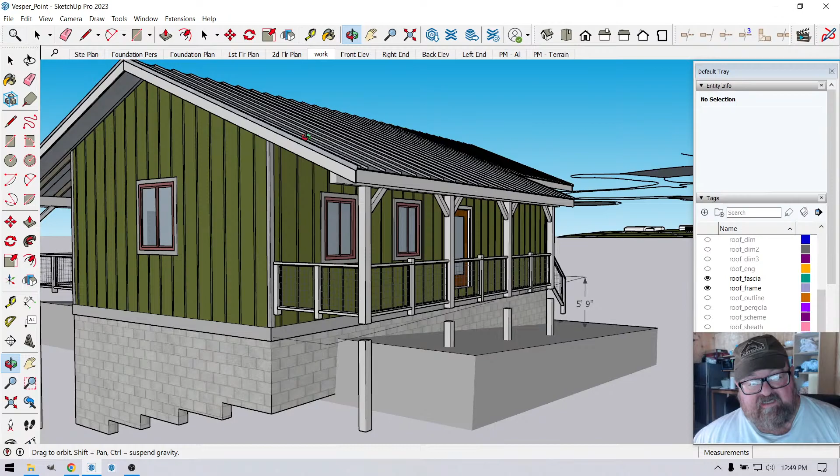Okay, I'm working on this church camp cabin, and this is the foundation perspective. Let me update that. But just to show you, these are the little cabins I designed for this church camp.

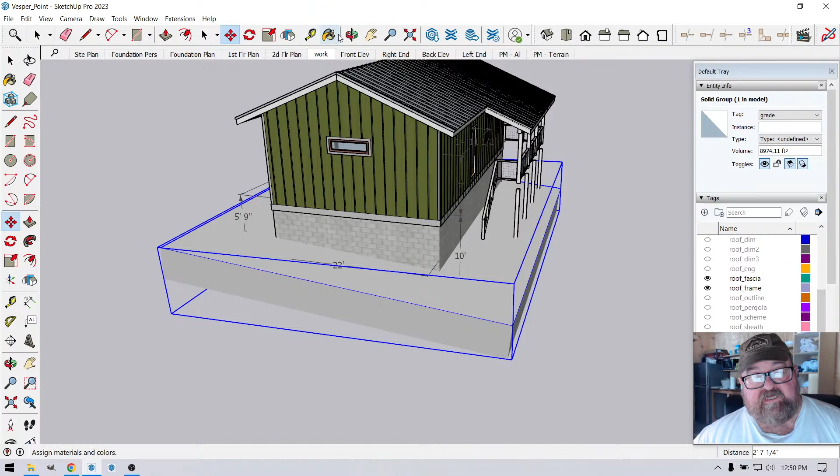I rotated it so that it would work better on the drawings. And so now I got to move my little site thing around. It's probably going to be down here. I'm kind of projecting the grade to be like that. Let's see.

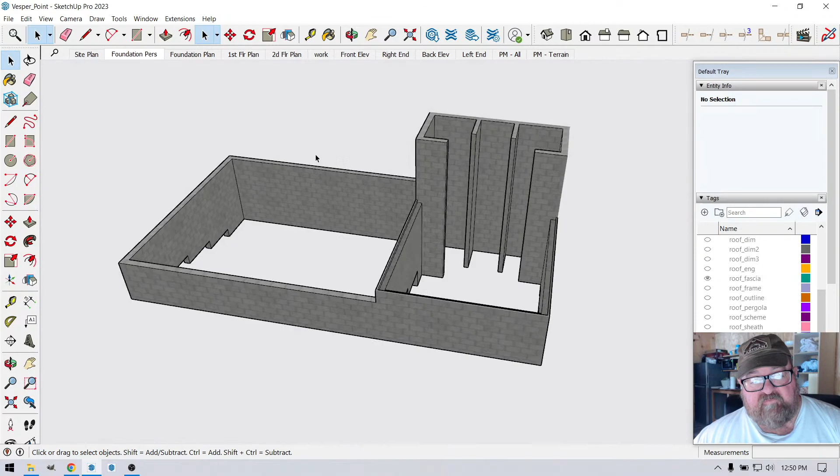So anyway, enough of that, because what I really need to do is put in this floor system. And so I thought I would just go live and share the love. What I'm going to do is start off with a rat sill, a mud sill, sill plate.

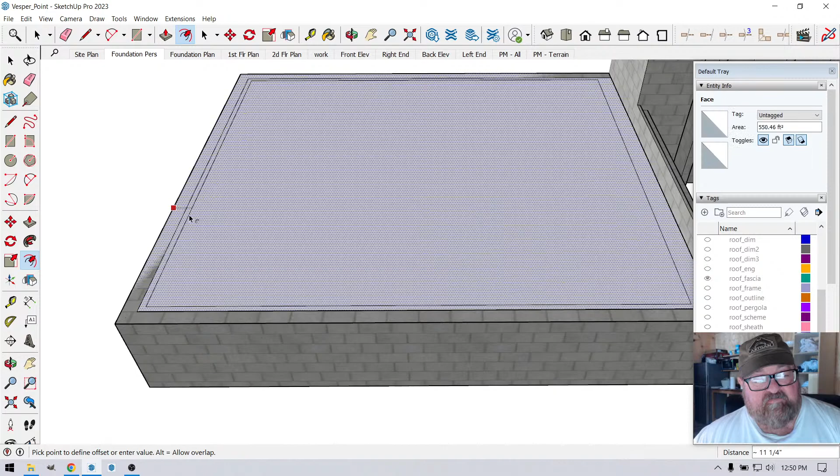It's like 5 different terms for this. It's basically, let's see, let's go with a 2x8, 7.25. And we will bring it up 1.5 inches.

Let me turn off my air conditioner. The trusty remote, aren't I? High tech.

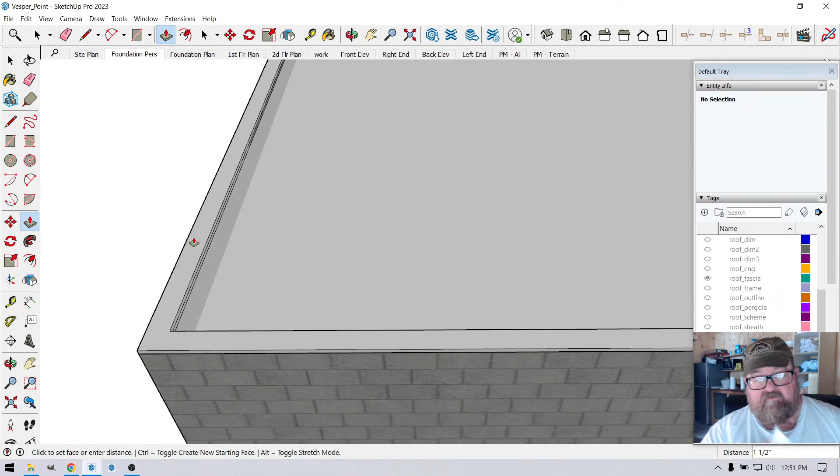So I just used the push pull tool to bring that up. And let's give it a material color so that it makes it easy to identify. Select wood treated. Let's see, wait a minute. Plywood. I thought I had a treated pine.

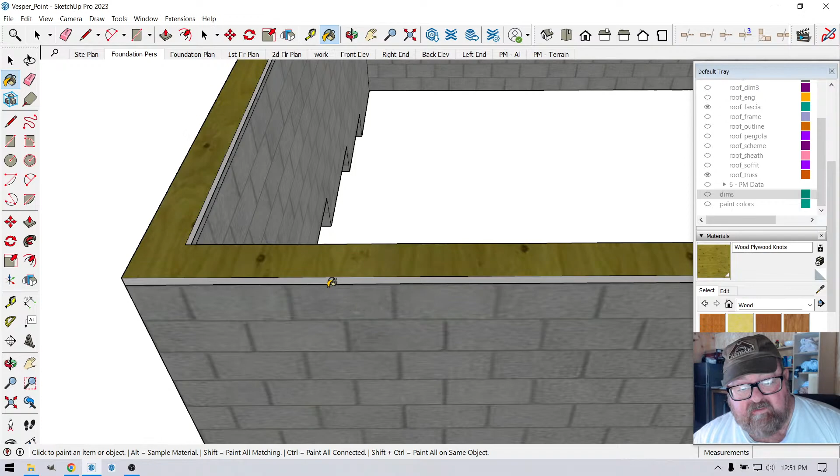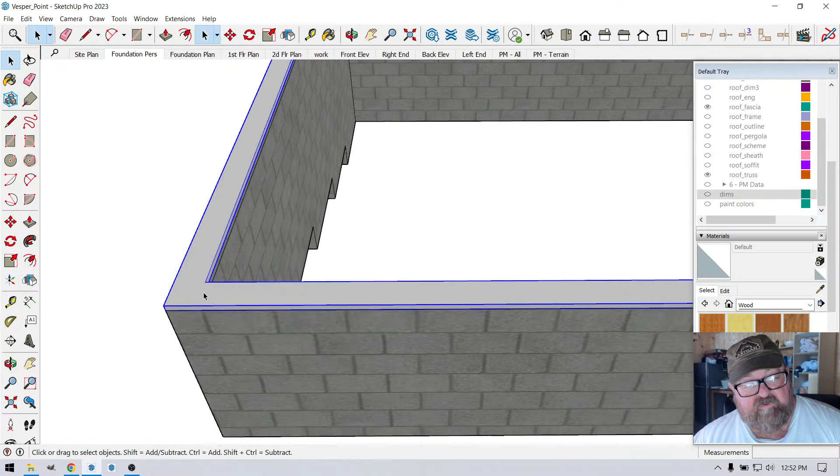What I should have done was pick the whole thing. Let's do this. Alright, let's make a group. And we'll go in there and select. Oh, I see, it wasn't selected. Okay, now you can see the grain is running the wrong way, but really what I'm trying to do is just give it a color.

So that'll work. And then over here, this will have to be pushed back. Get some pushback, because there won't be a plate right there.

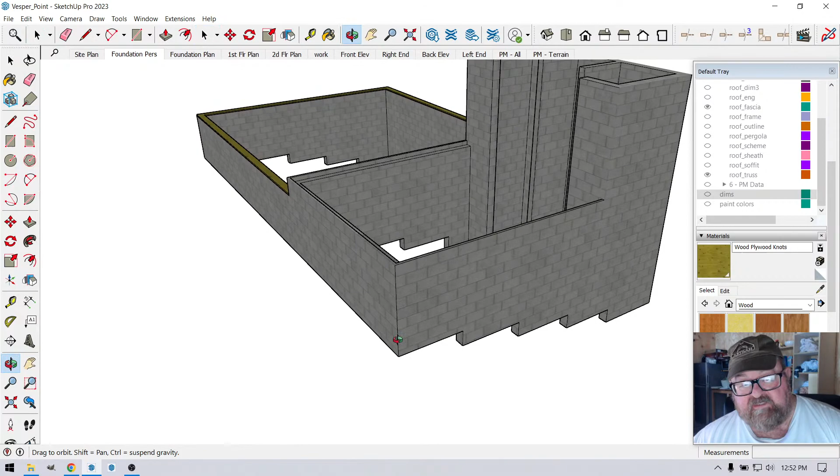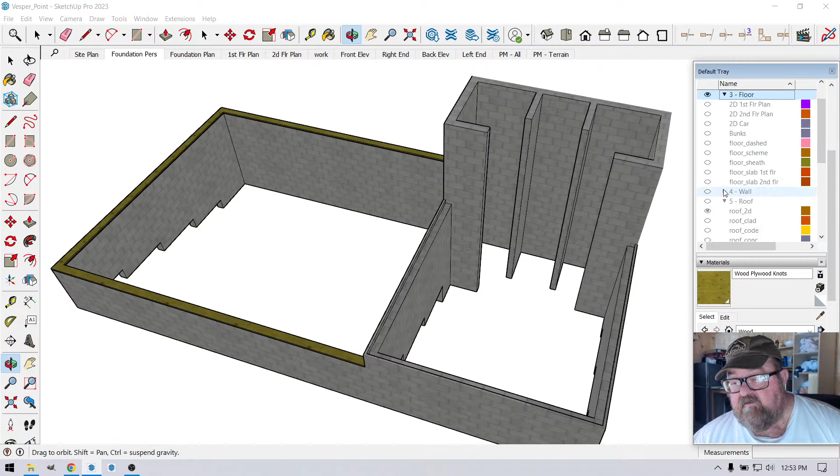The way this floor is going to work is, we've got these kind of steep lots, but they want the bathrooms to have a concrete floor, and then the walls of the showers to be concrete also. So if I turned on the concrete floor slab, that would be it. I'll probably just leave that on. This will demonstrate how the floors need to be flush with each other.

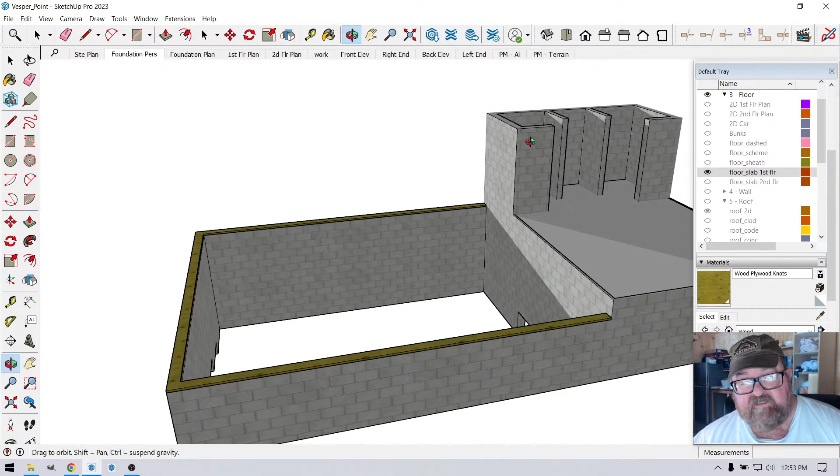Now that we've got our pressure treated plate down, the anchor bolts would already be there. I think this was kind of a schematic mode I did this in. I'll probably go back and use the Medeek foundation and do it that way, because it'll automatically put in the anchor bolts and everything. But I had this weird situation going on where I want to pour — I'm showing concrete block, but I think I'm going to pour all this out of concrete. That way I'll eliminate a subcontractor. I can get my poured wall subcontractor to do it.

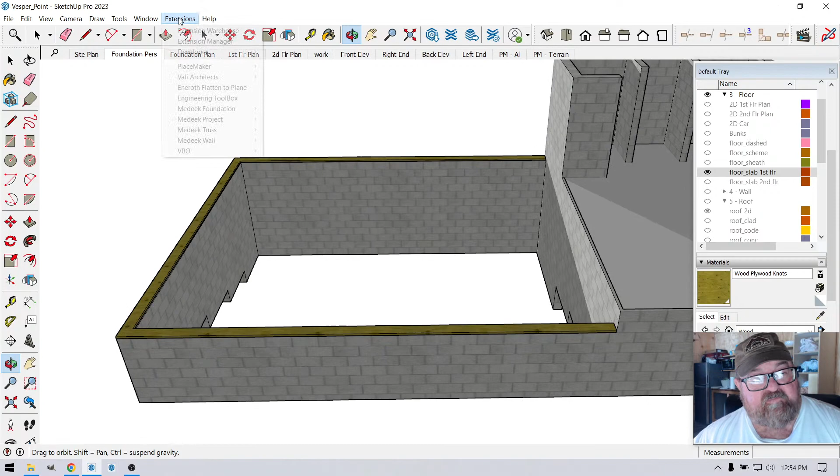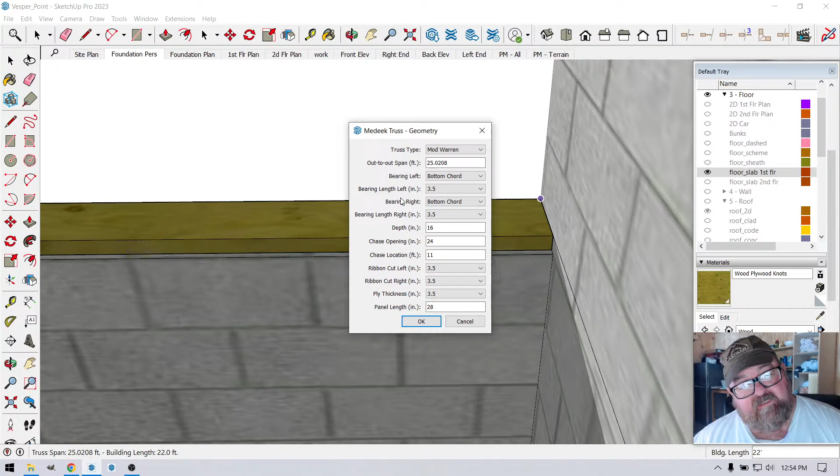So now I want to put these floor trusses in. Floor truss, rectangular, and I think I do this. Go over here. And then, oh, let's see. What I should have done is I should have set that back. Let's cancel this. I'm going to set this back so that I can, well, let's, okay, I'm going to delete it.

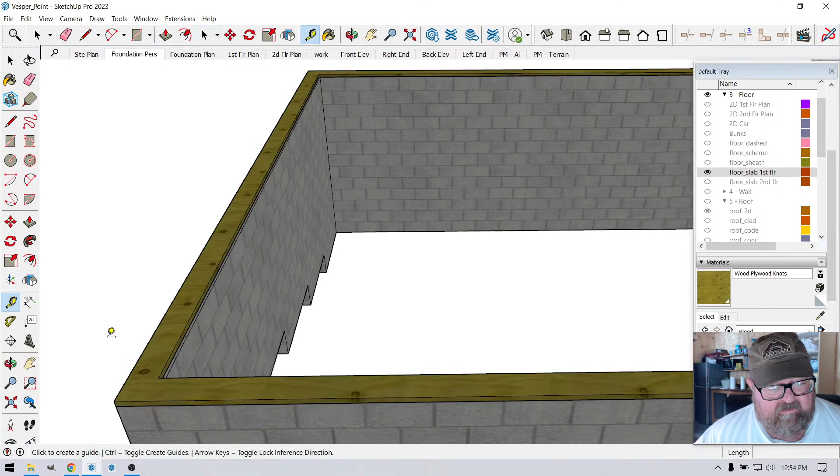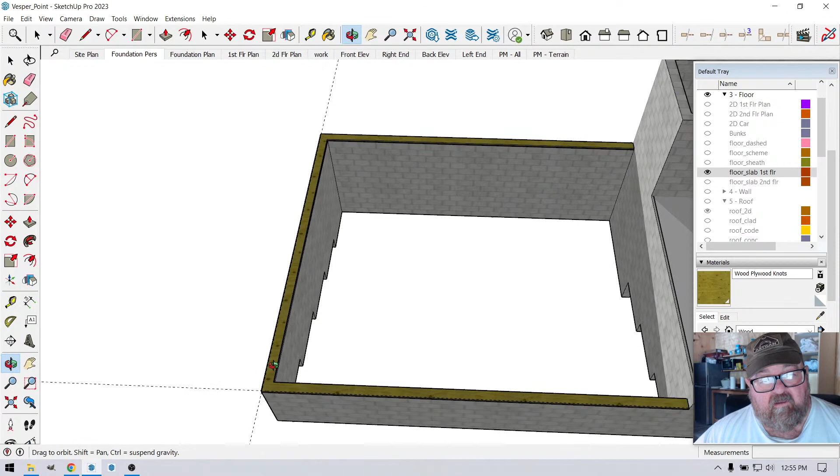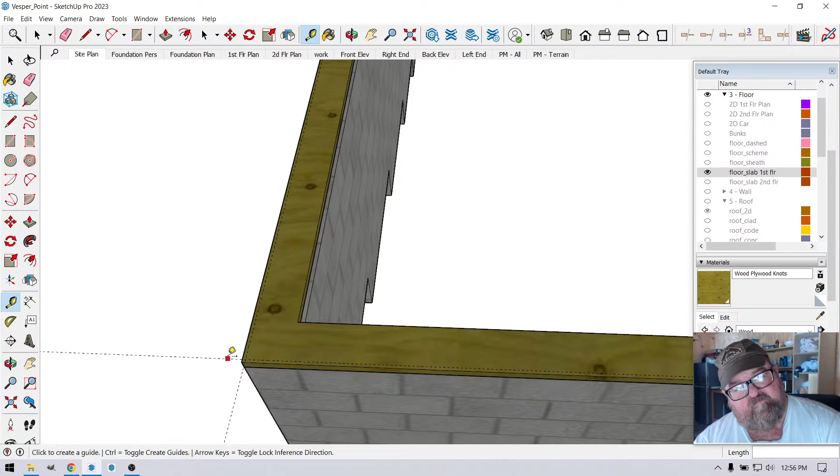Hey Alan, Tony. I was wondering, should be a lateral for that job. Unless y'all put that — I was going to go down to that back street like we did last time. Okay, they're showing, they sent us something saying might be a lateral available. The problem is the first floor would have to be pumped up if we did that. You know what I mean? I understand, I got you. So, because it's kind of like Crestwood, it's kind of like the other house we did right there, it's got a lower level. Yeah, we took Crestwood out the backside all the way down to the street. Yeah, I wonder though if it would be — I wonder if they'd let us if we did have a little. I haven't done one of those in a while. We used to be able to put like the tank in the back or whatever, and drain everything into it and then pump it from there. But I wonder if they'd let us do that. This sits in the city of Chattanooga. Yeah, we could do a little pump system for a downstairs bathroom. Would that be done inside or outside? I mean, you're saying just pump the basement up to the gravity flow. How deep is it in the street? Just a minute here, let me see. Because even the first floor level is probably 4 feet below the street. Oh no, let me go by over, Tony. I'll call you back in a minute. Alright, thank you, thank you.

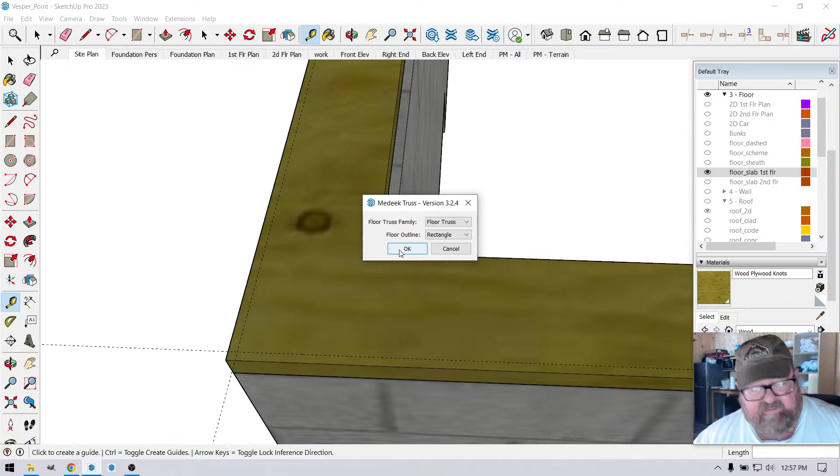My sewer guy — we're trying to get the sewer in on this house we're building. And was I going the right way? I think I'm supposed to do the span first. I haven't used the floor trusses in a while, the floor truss extension, so let me check this right quick.

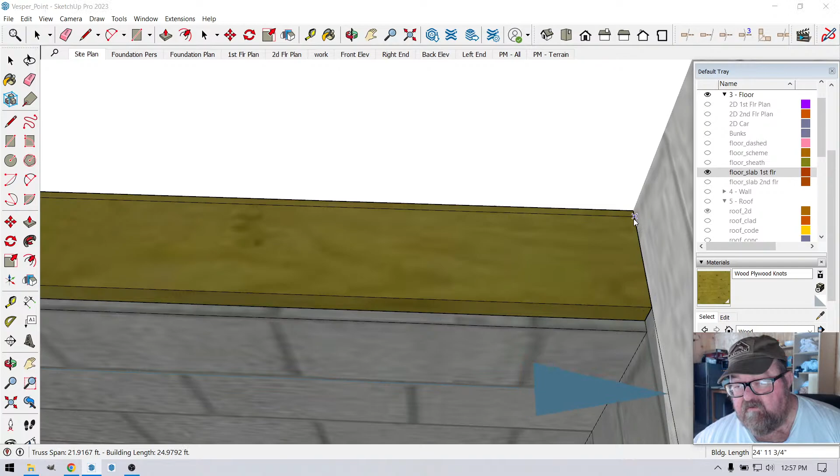I don't know why they're that color either. I don't remember them being that color. That's weird. That's bizarre. They used to be a...

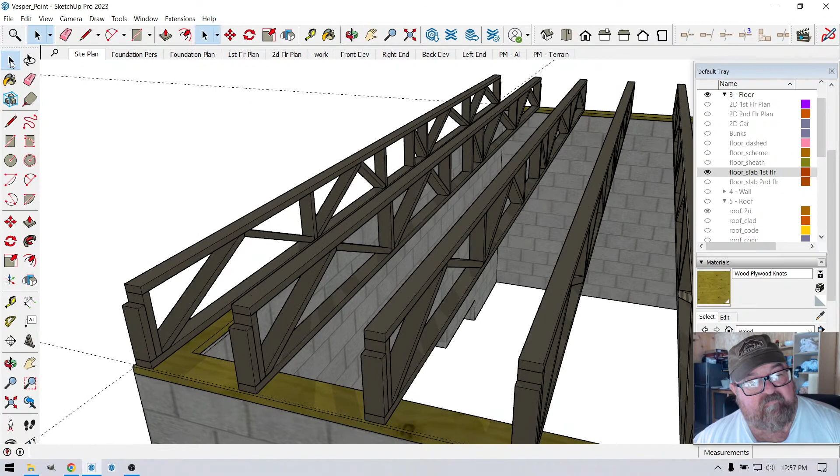Anyway, we can go in here and edit the floor, because I need to put them on. Let's see, do I still have my floor truss span table? I was going to put 14 inchers on 16-inch centers, yeah.

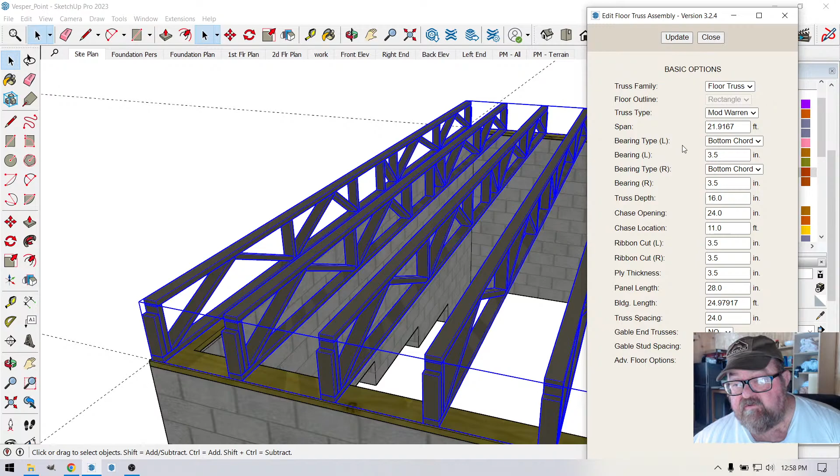So let's go, because this is a cabin, a church camp cabin. There's going to be 6 bunks in there, so you don't want to use regular residential loading. I'm going to use a heavier duty truss, so truss depth is 14.

And chase opening, we don't need a chase opening. I'll leave it there, but we don't need it. What I'm trying to do is get to spacing. Here we go, 16.

Gable end truss, no. Floor stud spacing. Oh, gable stud, okay.

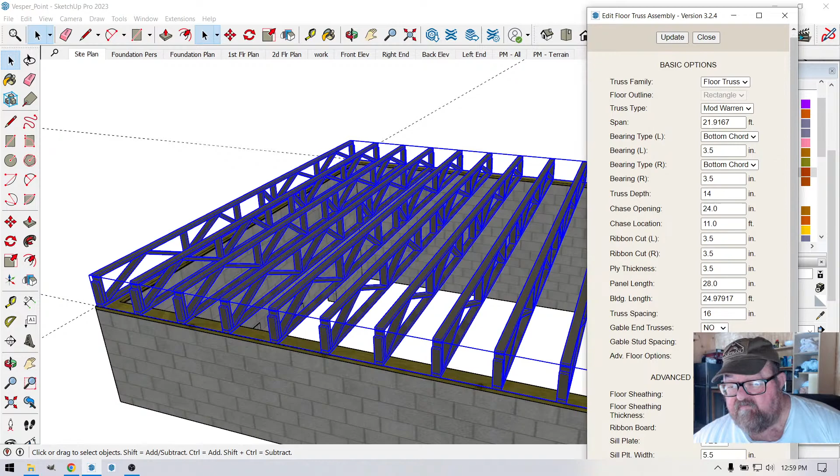Advanced floor options, yes. I think for now though, I'm going to leave off. Well, no, I'm going to turn them on. Let's update that.

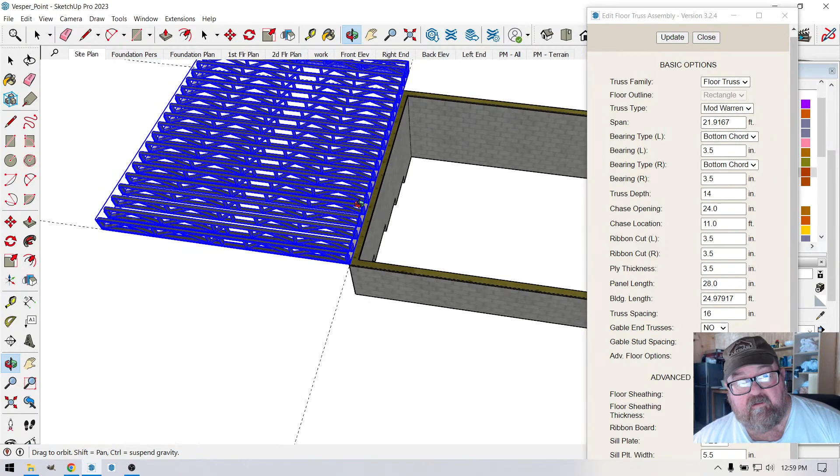And why did it turn that way? That's weird. Why is it when I do something live, it always acts funny, but when I'm doing it...

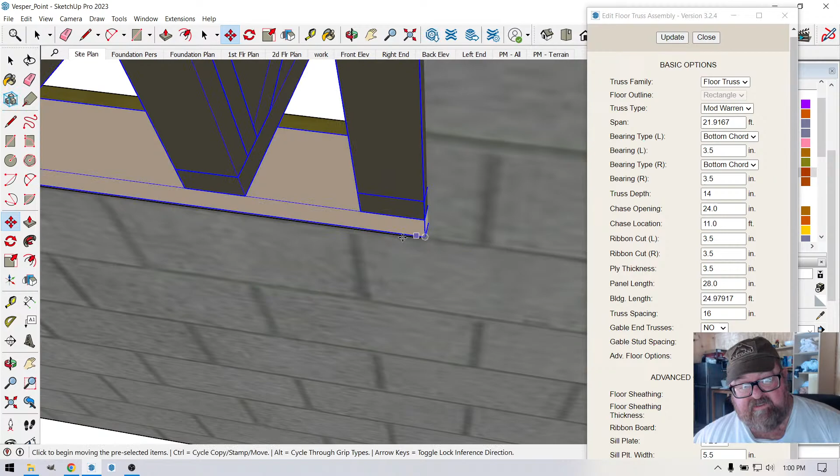I think he's probably done some changes to the floor truss thing.

Yeah, I think what I'm going to do is turn this off. Turn this ribbon cut.

Plywood thickness, ply thickness. Oh, 3.5. Panel length. Building length. Advanced floor options.

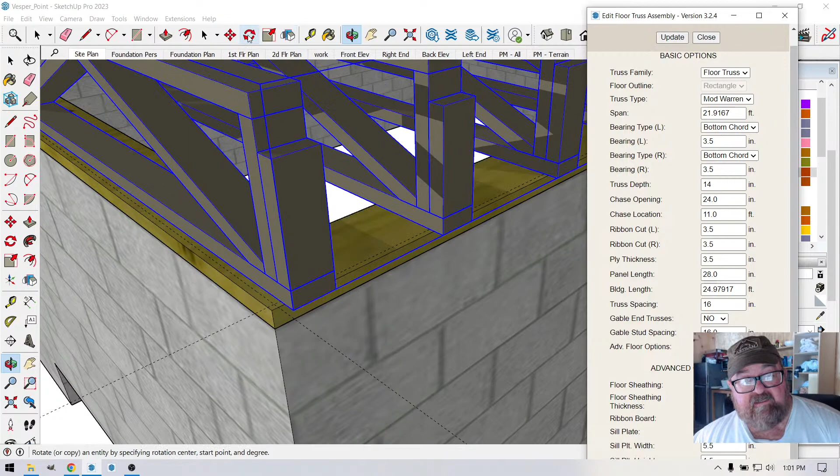Floor system, sill plate, no. Looks like I gotta make this bigger. Now let's push this back to my point. I like to put it right there.

Because what I like to do is face all this with OSB, even though you don't have to. And then, yeah, that's right.

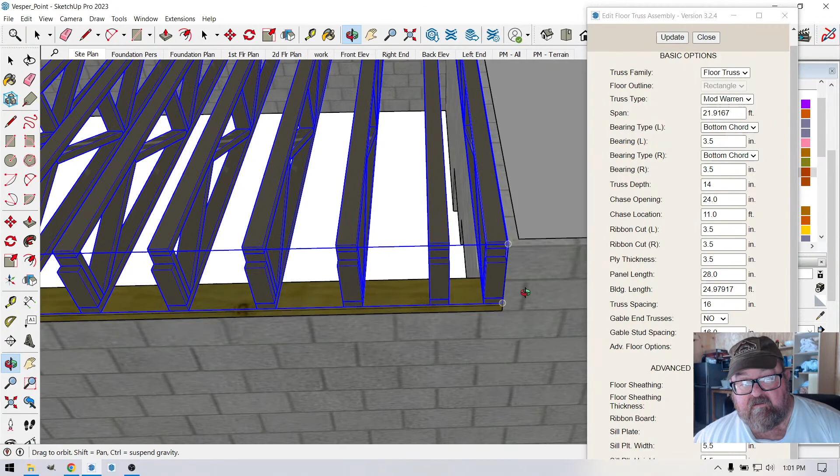I still don't know why it's got this color, but it's kind of annoying me, to be honest, because they used to really read well, and now they're all dark. Dark things never read well in drawings.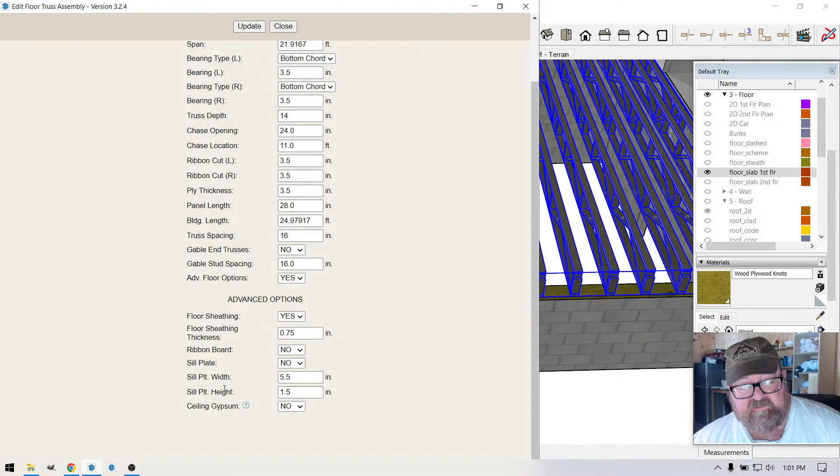Sill plate height, ceiling, just no, sill plate no. There's nothing in here about materials. Let's do this. So let's...

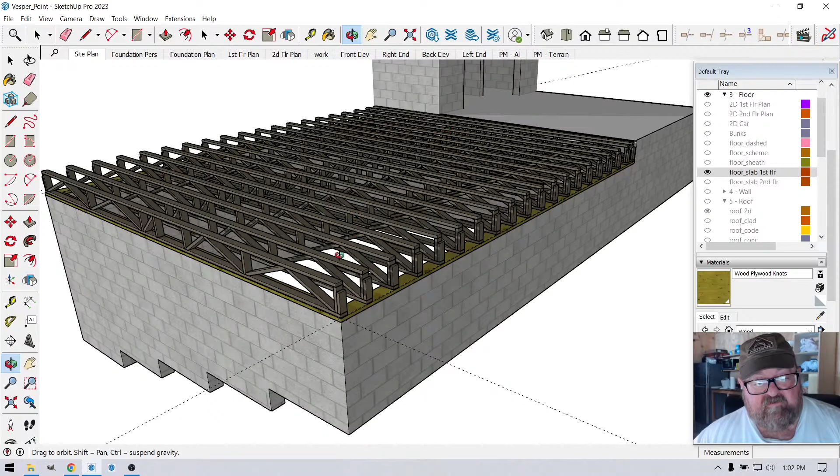That'll be a nice strong floor though. I actually like the... he had this nice...

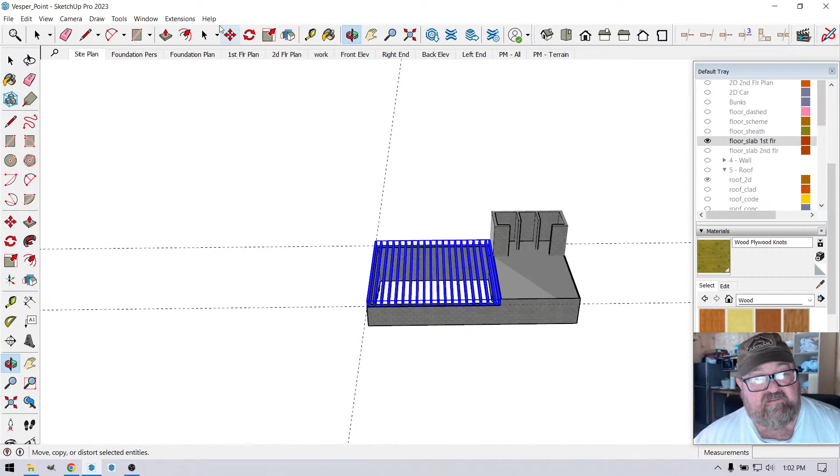Let's see if he changed the roof trusses. Roof trusses. Let's just pick anything.

Oh, I got the roof turned off. Huh? What in the world? Alright, so let's turn the roof, let's undo that.

Let's go to our extensions, truss, and we'll go to global settings, materials, lumber color, truss, timber truss washers, auto assign materials, manufacturer off.

There's the lumber color, pressure treated lumber color. Why is it doing that?

What color is it? We will select it and find out.

Medeek lumber. Well, we're just going to make you light. See how much better things work, or how much better they read when they're not so dark.

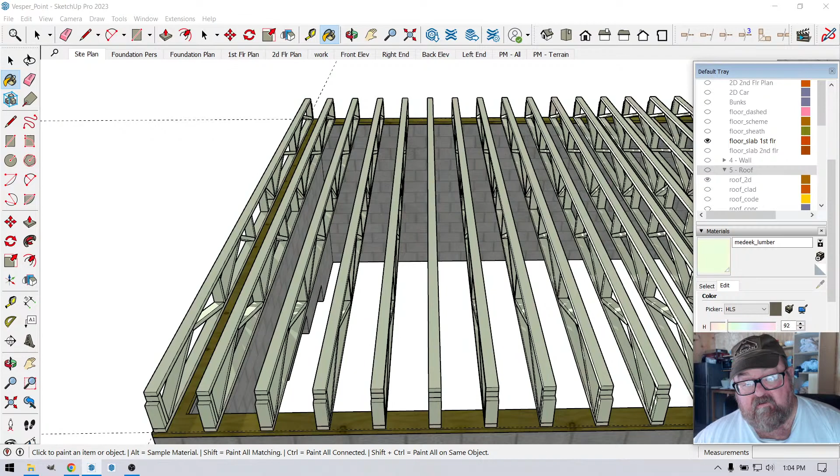We can make them purple. So that's a little bizarre. I've never seen that before.

If you've seen any of my other videos, you'll know that they look like lumber, and this is bizarre. I feel like I'm in the Twilight Zone here a little bit.

I can't even make them. Can't even make them white. All right. Well, that is a thing.

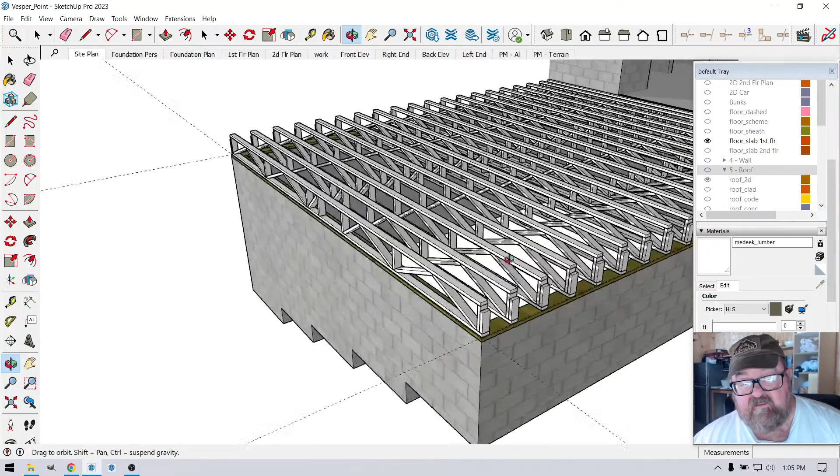So anyway, in any event, in this case, we really don't need the trunk, but I'm gonna leave it in there just in case, it doesn't hurt anything.

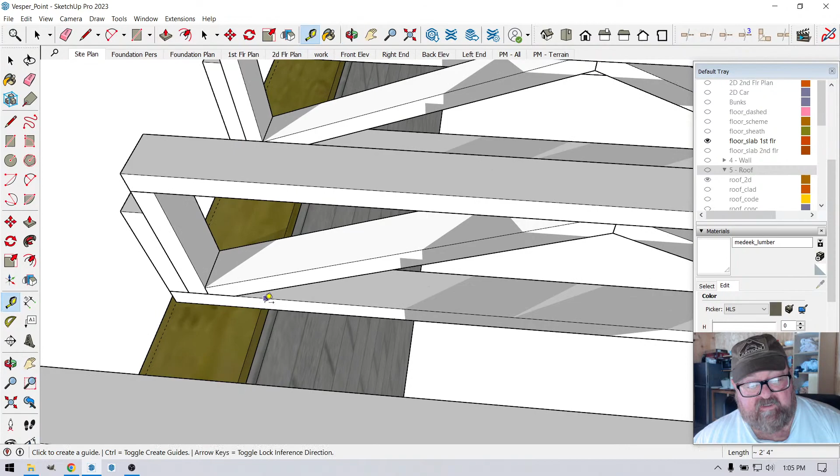But you can see our actual span is from here inside. Your span is not the total length of the truss. It's between the bearing points. So our actual span is...

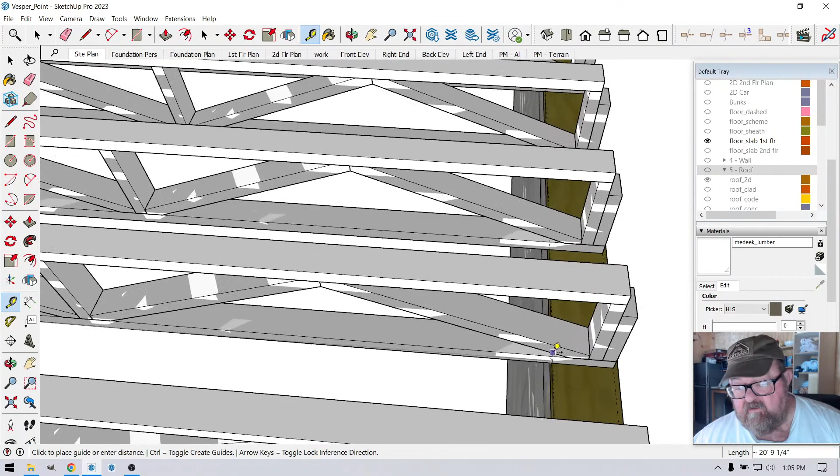Which truss am I between? I didn't pay attention to that one. It's 20 feet 11. I figured it was 21 feet. That's what I based the span table on.

And here I was looking at 14 inch at 16 inches on center will easily do, even on the deflection at 480, length over 480, I can still go 22.7. So we are good on that.

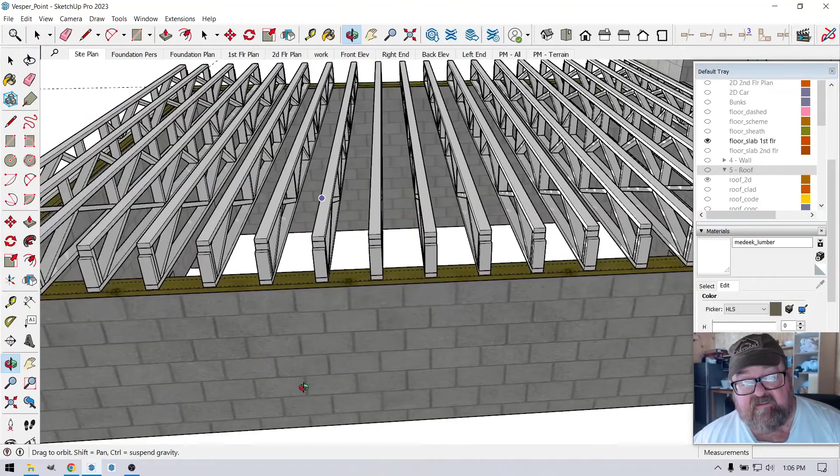And so now what I can do is kind of take a snapshot of this and send it to my truss guy. But I was hoping that they would look like trusses.

And I don't know why. It's bizarre. I don't know if it's something that I did, but let's check one more thing, one more time, and we'll see why.

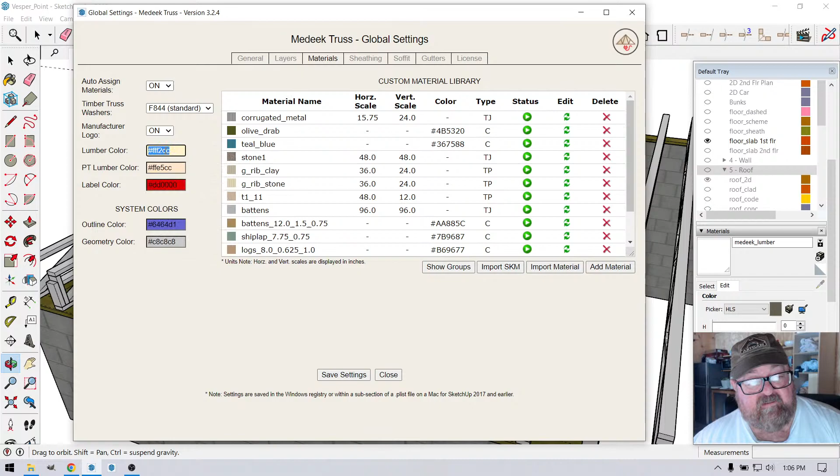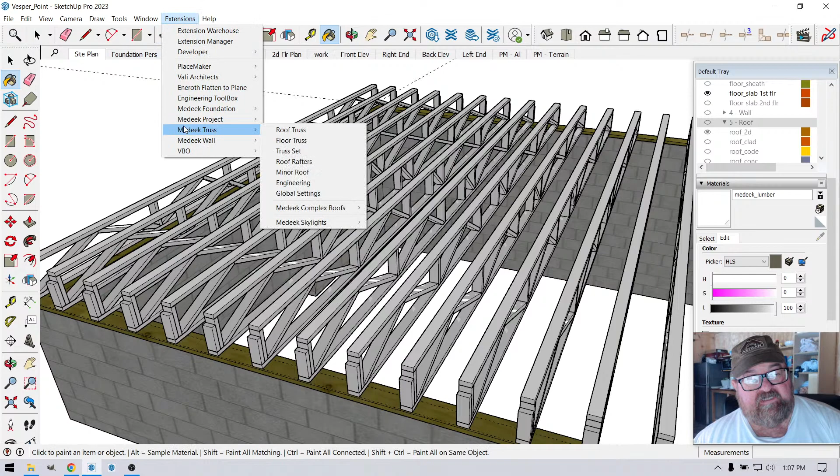If I can copy this. And what was it? I can just enter those values into... just occurred to me.

Well, I don't think I can. Can I? I can only put numeric values. I got an idea.

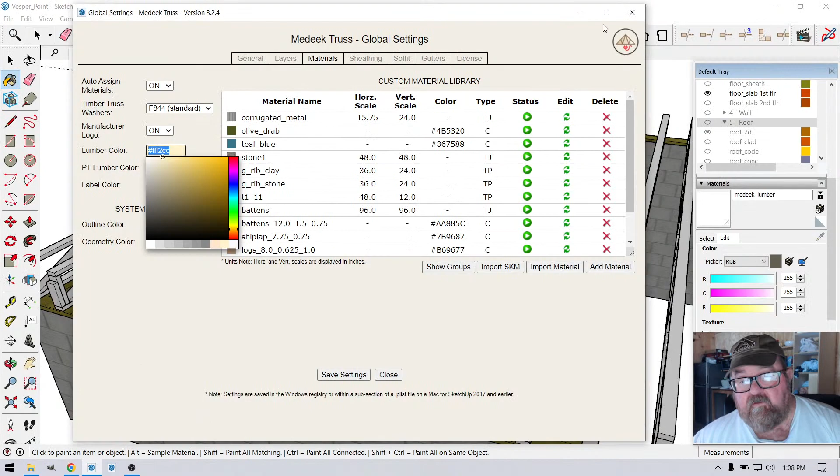What is the RGB equivalent to 255, 242, 204? 255, 242, 204.

That's still not. Is that RGB or?

Okay. HLS. Okay, it has to be RGB. Yeah. Oh well.

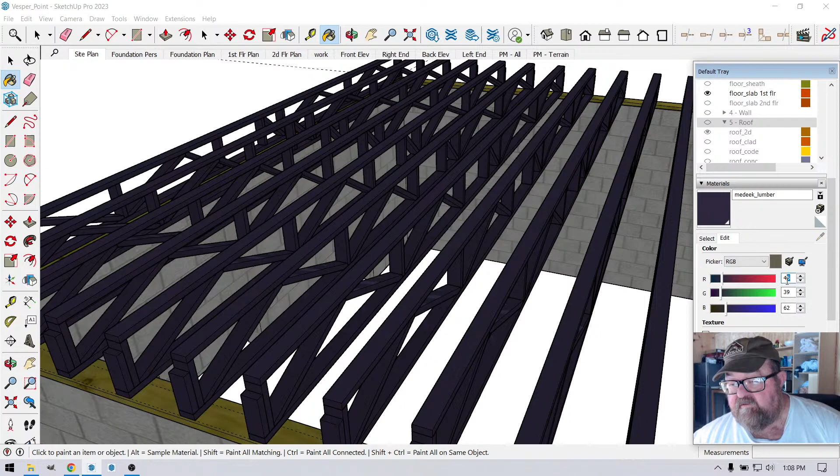Alright, that it is. What's bizarre is that it looks right up here in this little swatch, but on the screen it looks weird. So it must be something, hopefully it's not my screen, my display.

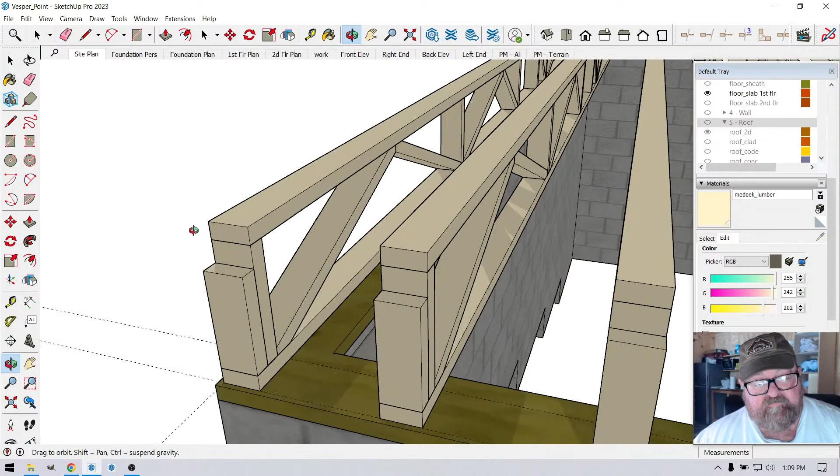So anyway, those are the floor trusses, and then what you get is you shall get a 2x4 from here to there, and it will come out like that.

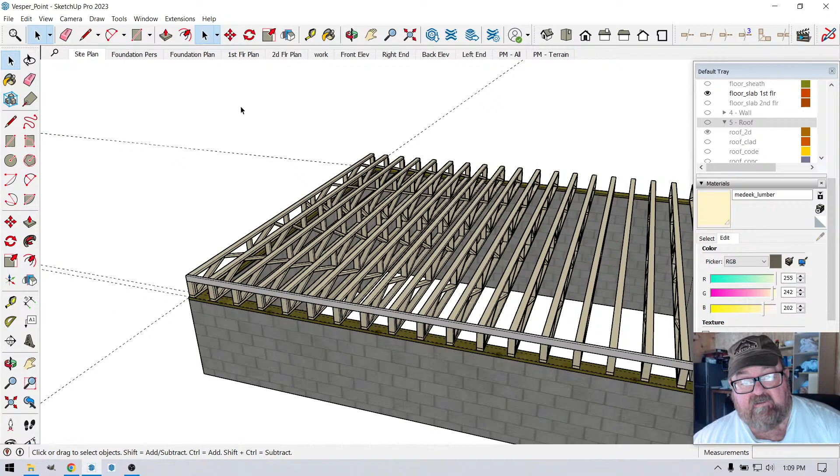And I really don't understand, because even the colors that I'm expecting to be what I think they are, are not working. So I don't know what's going on here. That's weird. So anyway, so we got a 2x4 that'll go there.

Wait a minute, did you see the color just pop? Did you see the color just go right whenever I did that? Huh. My computer's overheating, it's pretty hot.

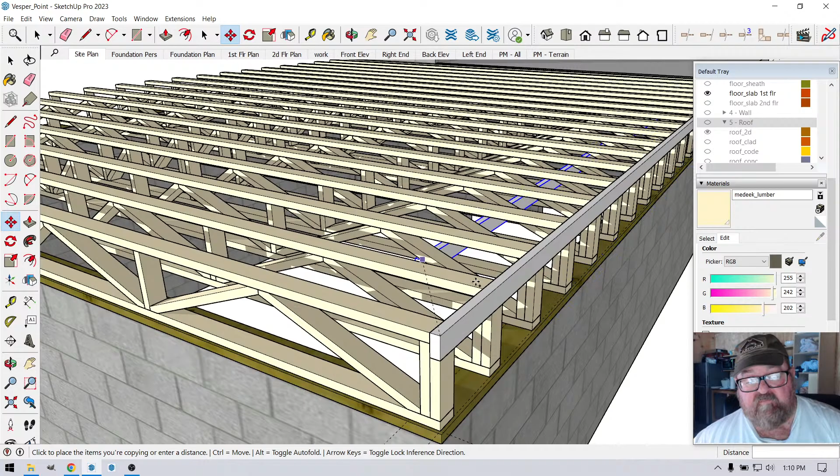Alright, we'll get a 2x4 there, and what that does is just gives them, they're just very rigid that way. That gives them lateral bracing.

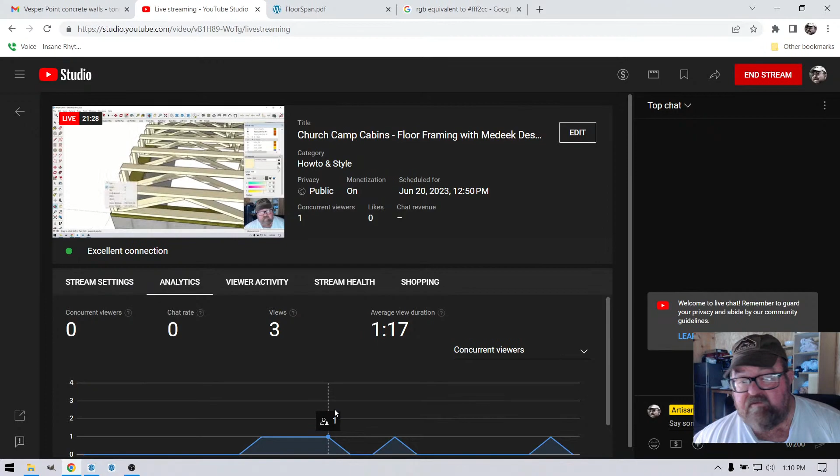See if we got anybody watching. Not yet. It's okay, I'm doing this for the owner. I do these videos for the owner's sake, and also for my subcontractors to see how I want things.

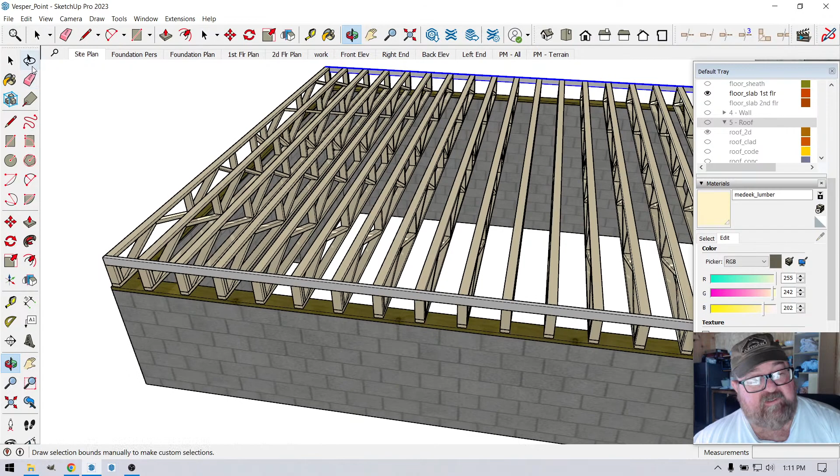So everything is cool. And then if I go here and turn on the subfloor, let's see, it's on... oh, it must be turned off. And the floor, yeah, floor sheathing. There we go, you can see it's nice.

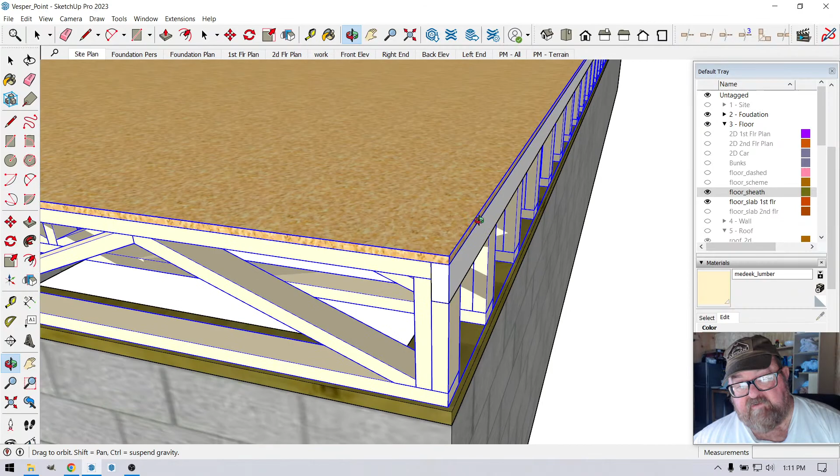And what this does too is it gives you, now we can run OSB around, and so the walls, so what we'll do is we'll build the walls. As a matter of fact, I need to turn those on. But let's see how close this is turning out to be flush.

That's not too bad. I mean, what is that, 1/4 inch or something? Yeah, probably less than that if I set the tolerance on the...

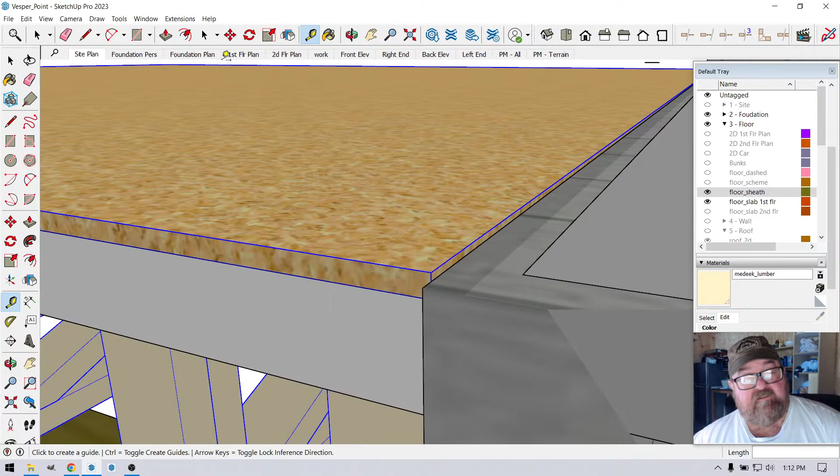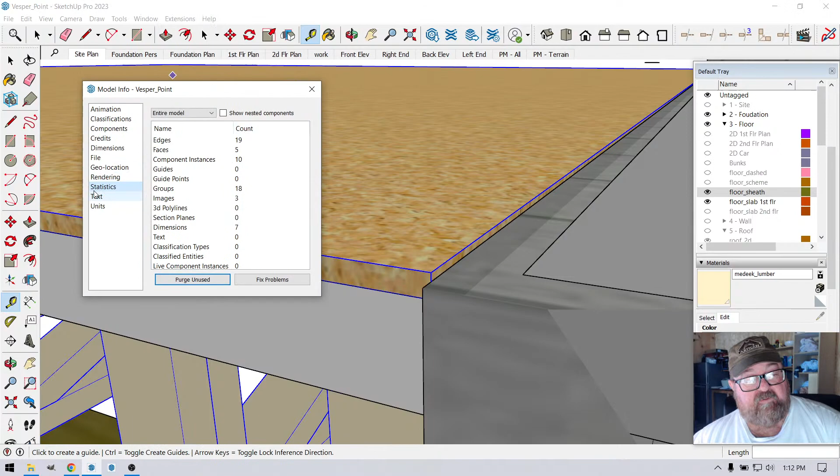Do I have that? Oh, let's see, that would be in preferences, right? I was in preferences, let's see, units. Where is units? Drawing. Model info. Units. Here we go.

Yeah, I want it to display at least to the 1/8 inch. 1/8 inch, 1/8 inch. And then we'll see.

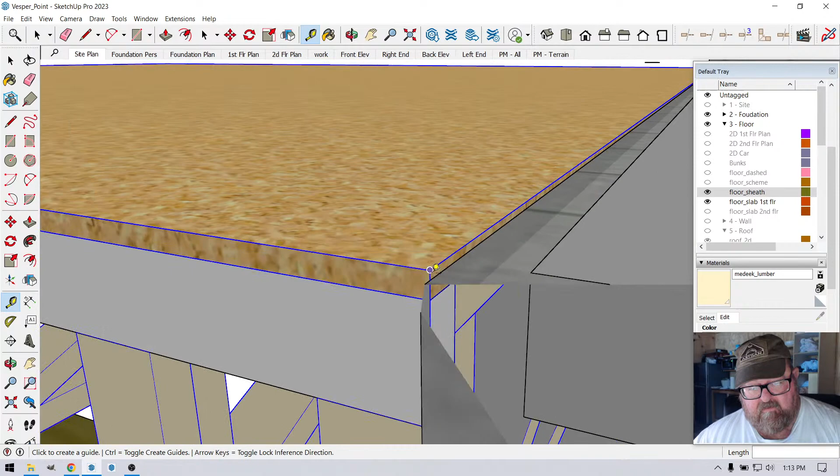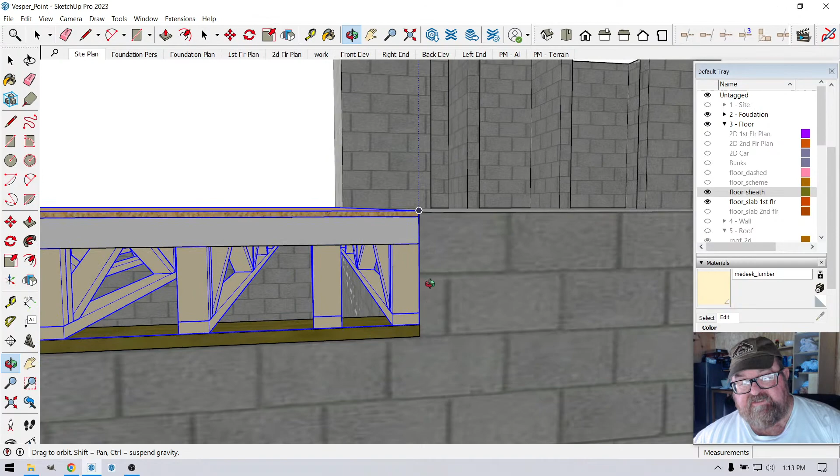Yeah, 1/4 inch, that's not bad, because what will happen is we will probably have some kind of tile. And if this does turn out to be concrete, this is based on 2 courses of block. I left out 2 courses, which is 16 inches. So I knew it was going to be a little off, because you got 1.5 inches and 14.

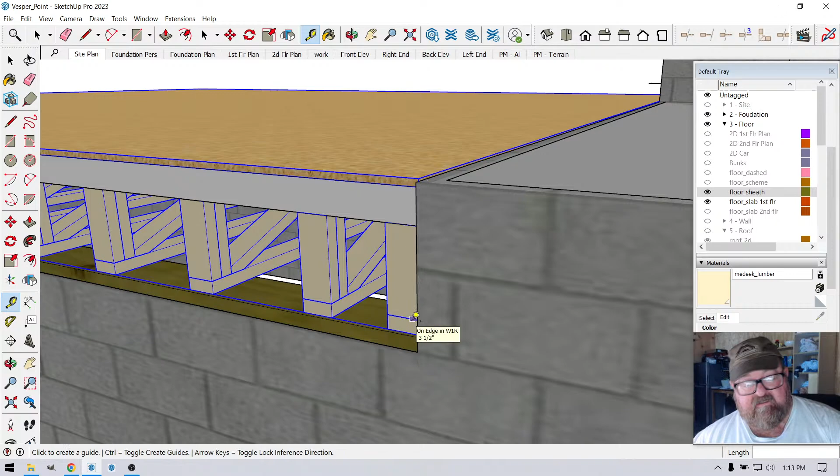That's 14.5 with the... but that should be... oh, yeah, 16. 14, 15.5. Yeah, 15.5. And so that would be, yeah...

16.25. With the Advantech's not quite 3/4, so it's only going to be probably an 1/8 inch off, which is not bad. We can do a little floor transition.

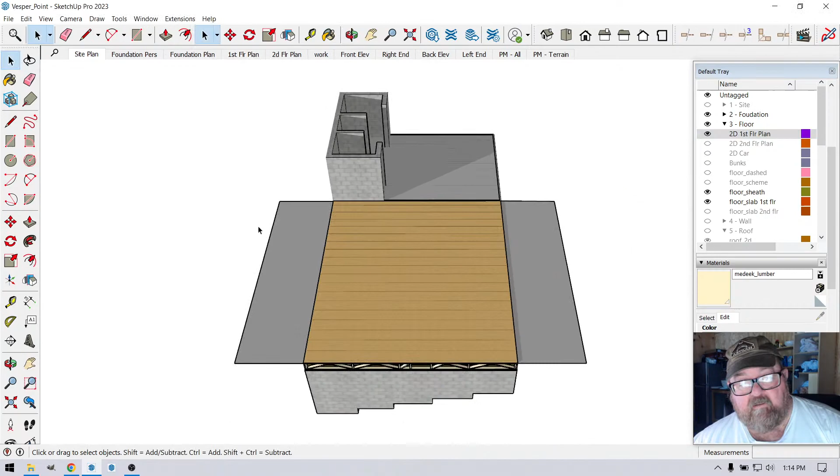Now see this, where this door is, if I turn on the floor plan... for some reason... huh? Something's kind of weird about all these colors, and the floor plan should be...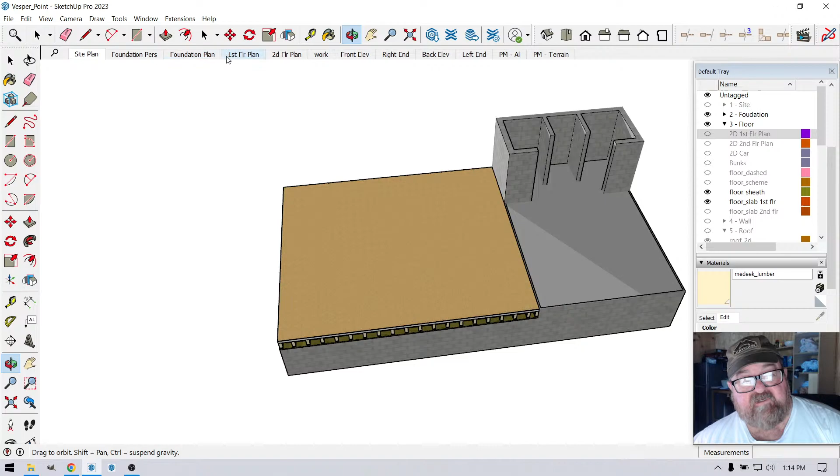Let's see if I go to the first floor plan. Yeah, there we go. You can see the floors don't really meet except for right here at this door, and that's just a little transition piece there. Other than that, doesn't really matter.

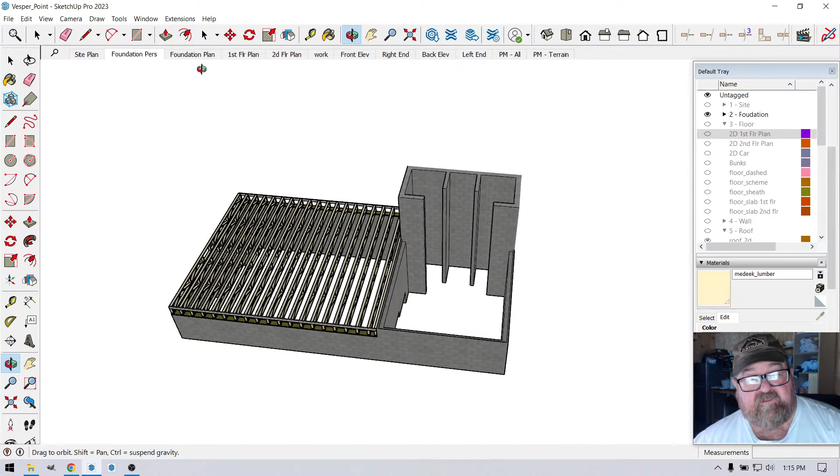So let's go back to foundation perspective. Now what I'm going to do is I'll probably go to this foundation plan, and this is just a quick way to... let's turn this on parallel projection. It is on parallel projection already. Is this straight down? Yeah.

So now what I can do is, instead of, I mean, if I was doing construction drawings, I would put this on a sheet, and put on a title block with all that. But I'm just trying to get pricing on these floor trusses.

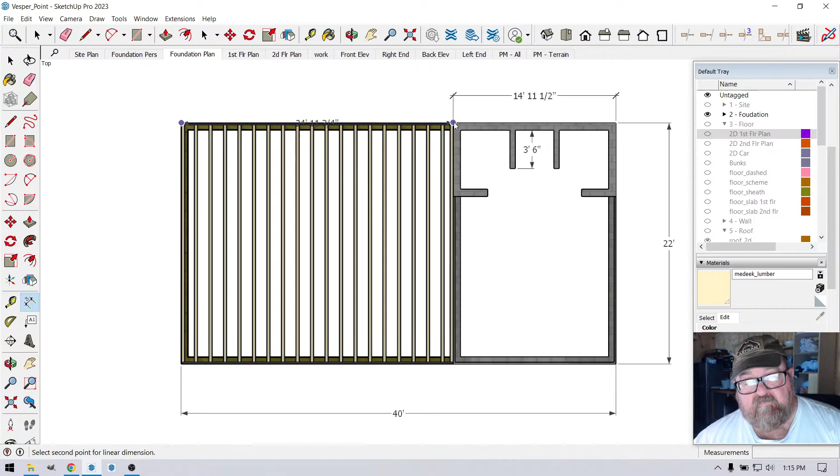So what I'm going to do is, I'm going to get it at an angle so I can get the right measurement here.

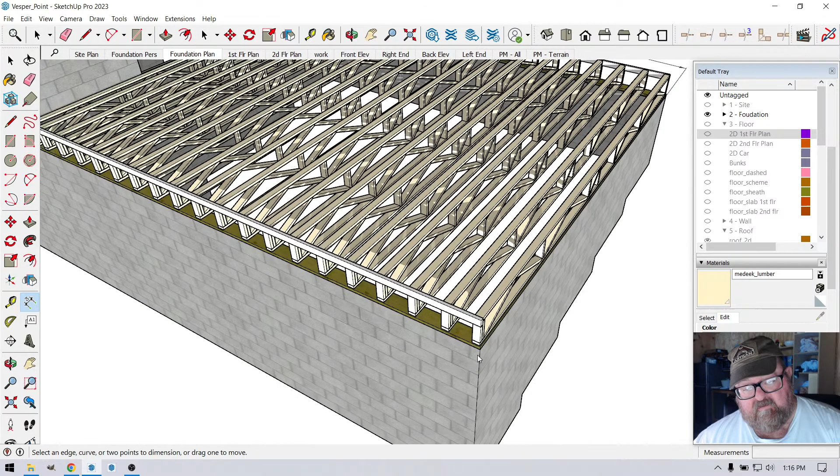Because this should be something to a 1/2 inch. Yeah, we're just gonna measure it to the foundation here. I'm trying to get it to lock that axis.

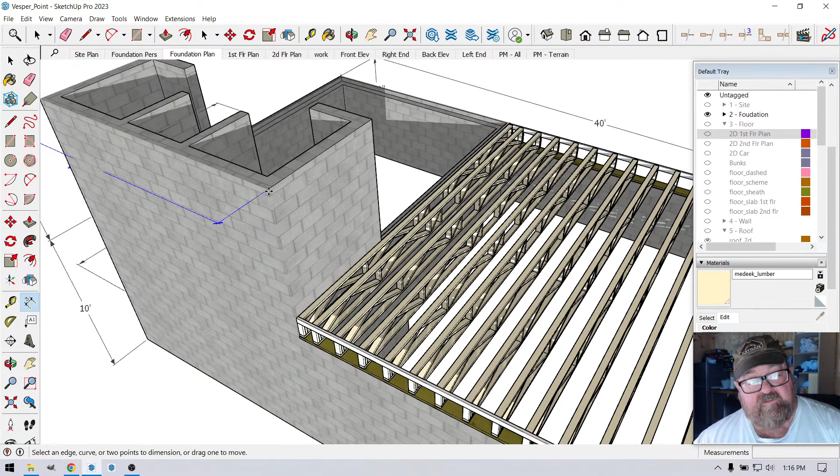So, maybe if I do it this way. I'm trying to kill two birds with one stone here. I'm trying to... what is going on now?

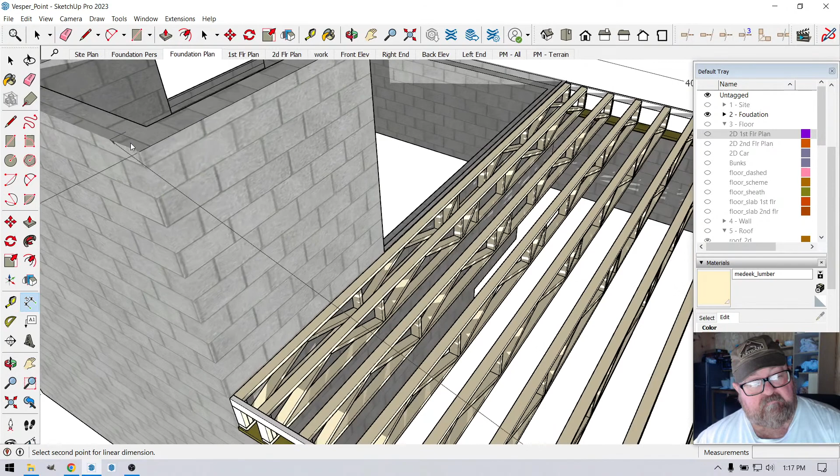Well, that ain't gonna work. The dimensions are... I think they purposely kind of do the dimensions kind of wacky in SketchUp so that you'll be tempted to buy SketchUp Pro, which has a software called Layout, and that is where the dimensioning really works better.

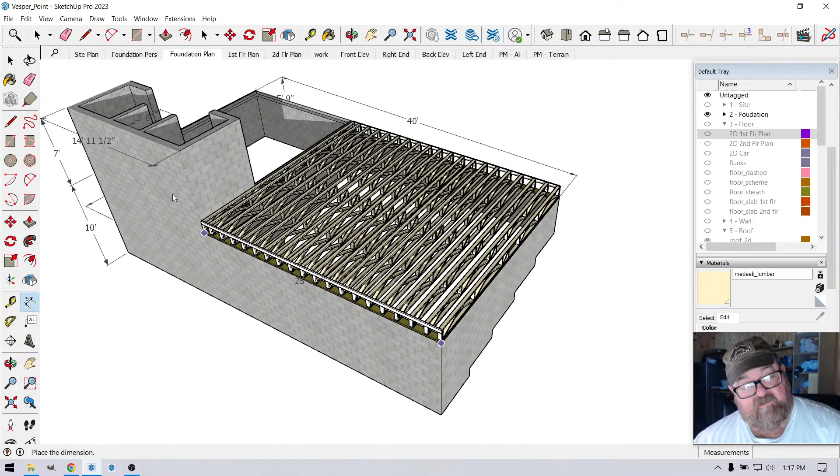What I was trying to do is get that axis to lock. There we go, well, it was locking there for a minute. What I'm going to do is get back into this view,

and I'm just going to move that to there, and I don't know why that's different.

I like this little tick mark on mine. So now I can just, this is simple enough. Put that in the right layer.

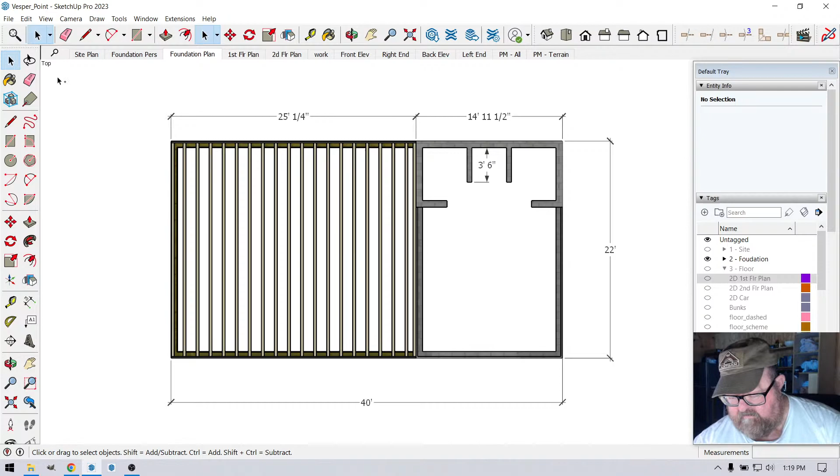I can take a screenshot like this. Print screen. Go to here. Put it in there.

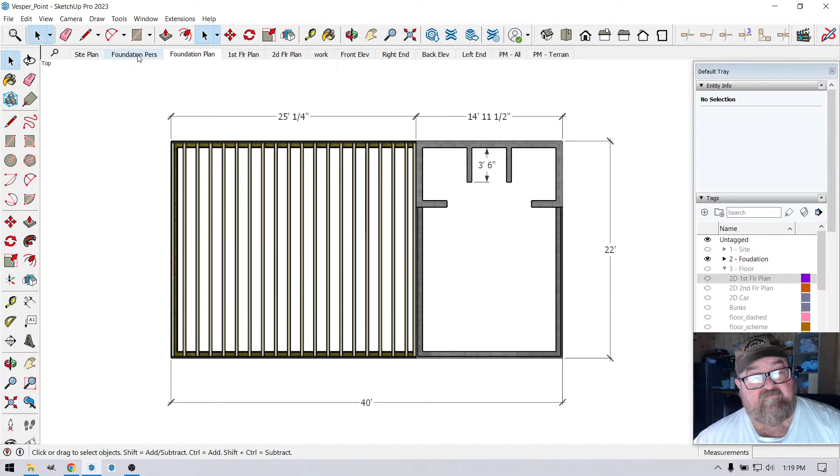Then I can go back to that perspective mode and turn it around. Do another.

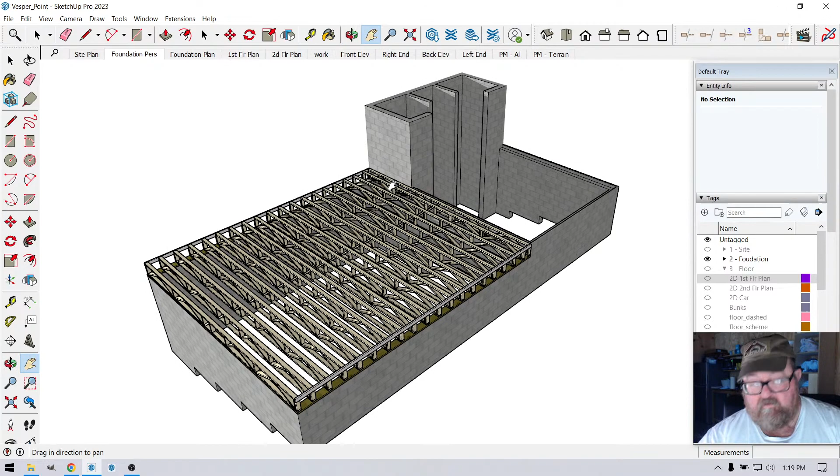Another one. And you can see this is where I sent it to my foundation guy, but it doesn't have the floor joist on it. So now I'm going to send it to my truss guy

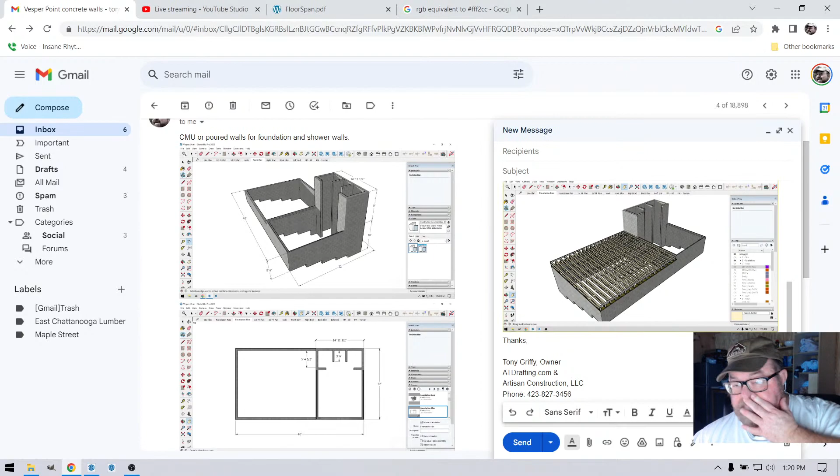and get information there. So anyway, that was a quicker video on the floor framing for this project, and we will see you in the next one. Thanks, guys.